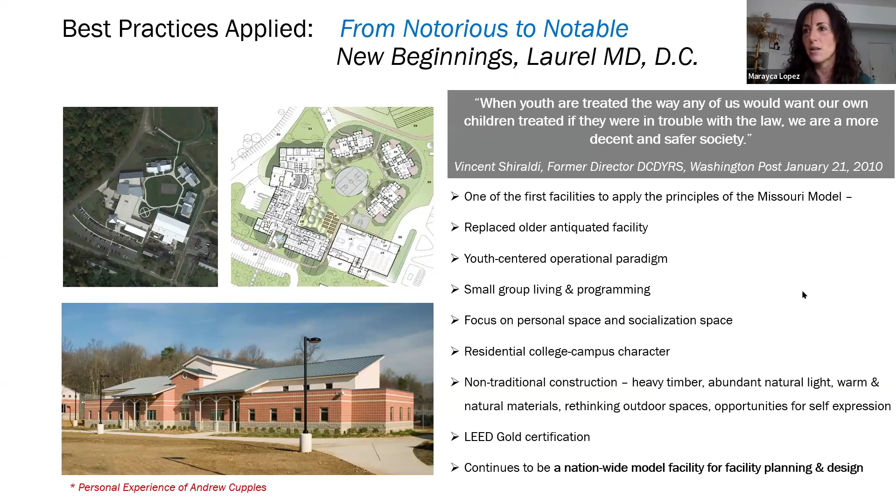As you can see, I'm showing one of the cottages, one of the residences. But what I'm going to show next is the feeling of the open campus.

For some level kids, the movement throughout the campus is free. For others, it's escorted, but in any case, it emulates how their daily life will be in the community.

Like in the morning, they will leave their houses and go to the school building, either to attend a class or maybe to receive some kind of vocational training and living skills.

I cannot help but stress the importance of the chalkboards, because the boards allow the kids not just to express themselves, but from a management perspective, we also discovered that from the staff's perspective, this has become an intelligence tool, because there is a lot you can learn from what the kids display in those chalkboards.

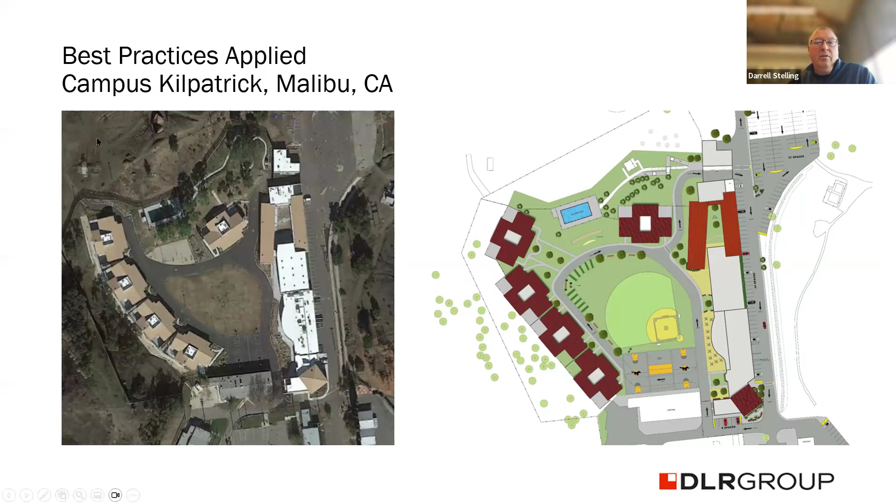With every facility we do, we're creating a new model for that specific jurisdiction based on the kids they have and the specific issues they have. But they're all built on that premise that goes all the way back to the Missouri model. We're developing newer and newer best practices as we move forward designing these facilities and learning from each one. You'll see a lot of similarities, but also a number of different nuances.

So we start off with Campus Kilpatrick, which is the first model we did in California to develop a new model for LA County. This project is a very remote Malibu Hills facility, so just with that, it presented some challenges for them, but it is very much a camp, as you saw with the other facilities that Marayca showed.

It's really about creating a normalized environment, creating a campus, creating normal attitudes for the youth incarcerated in the facility to have a normal daily function. They are in their housing units at night. During the day, they're walking out to recreation, walking to their classes for school, walking to the gymnasium, and dining in a dining hall just like they would in a high school setting.

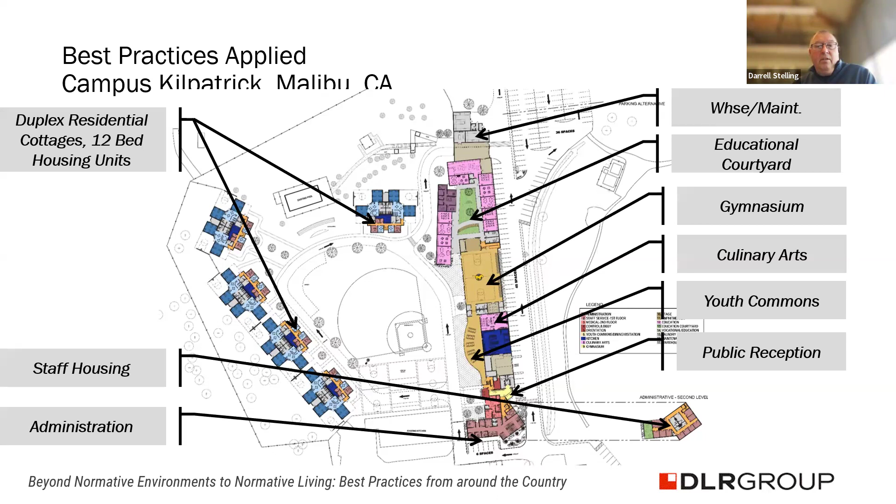The security measures are very passive in these facilities, in that they're still hardened in some locations to allow for safety, but the passiveness is that you don't recognize it as something secure like you would in the old style facilities or adult detention, which everything kind of stemmed out of.

It does not look like a control room in this facility. It looks more like just a normal office space. As soon as you approach the entries into the facility, again, it's a very normalized campus-like environment, like you're walking into a high school atmosphere or even a junior college type atmosphere. Go ahead and go to the next slide.

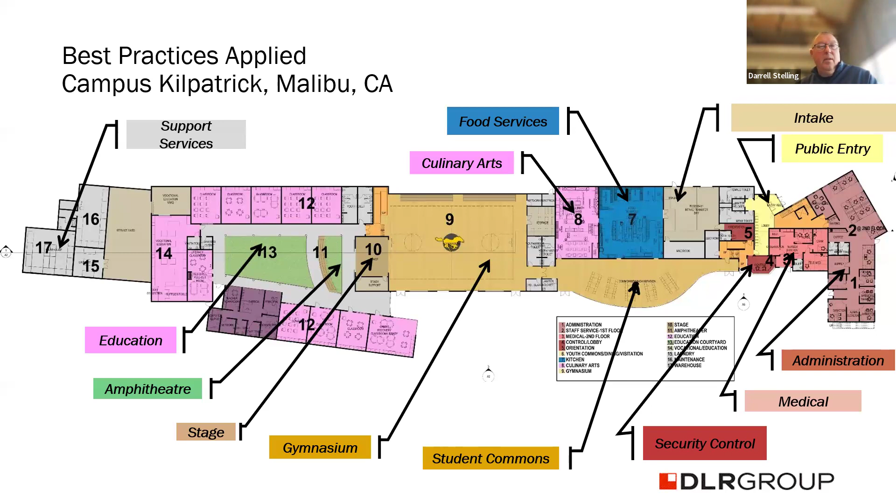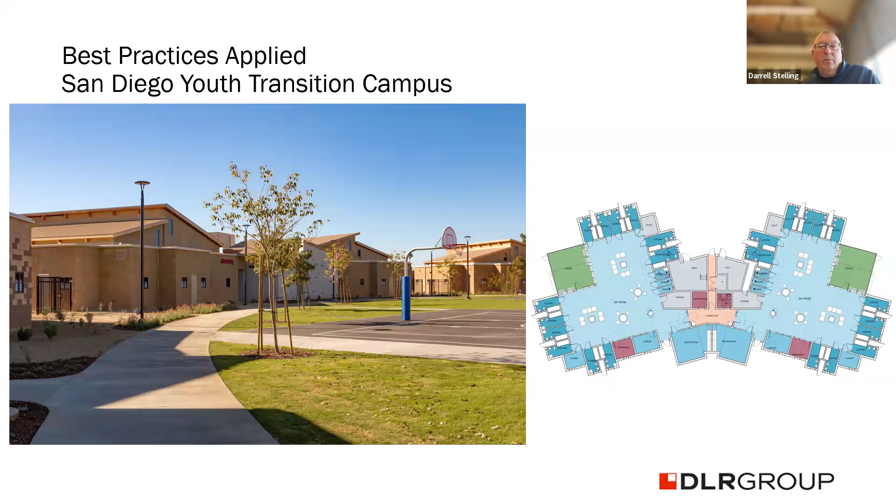So the perimeters of the buildings are totally secure. We have security windows on the perimeter, but we did things with these to still make them look more residential in style. We did muntins on the windows instead of bars, and different things to make the things that make it secure be more passive in nature than hardcore looking from a security standpoint.

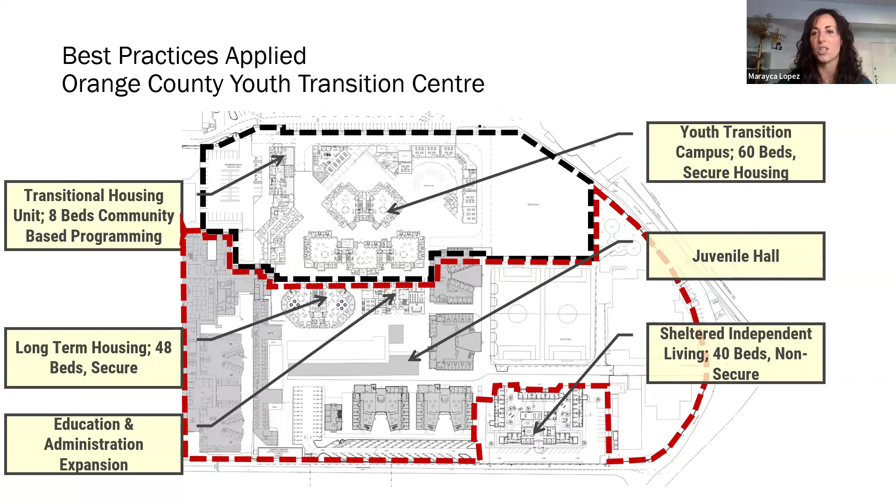That's why we're co-locating in these facilities this type of services that didn't exist in the past. Even when they say everything should be community-based, when you dig into what exists, there aren't a lot of shelter beds or transitional housing in the community for this population. So we're bringing them and co-locating with our secure facilities, but outside the secure fence, and sometimes under the jurisdiction of a different department, which helps with the budget.

That sheltered housing unit is the first time we've seen that done in the nation, built new from scratch. We've seen some retrofit attempts at parts of that, and we've seen it done in a couple of adult institutions, but this is the first time we've seen it done in a youth institution. So very much the next thing to come.

So here's a floor plan image of the overall layout I talked about. The upper right is the classroom, very similar to before. This is a much more compressed site than the other couple of sites we showed you, but we're still trying to do the same things.

Kids still leave their housing units during the day and come back at night. So when they're out, they're meandering through the site, walking from place to place where they're supposed to be during the day - either in school, walking over to dining, or to recreation, which is actually off to the right. You can't see it in this view since it's part of the existing facility, so we're not really touching that portion.

It's really set up just like the other facilities to normalize the way they go about their day. This will be heavily landscaped, which shows what we're doing from a landscape standpoint.

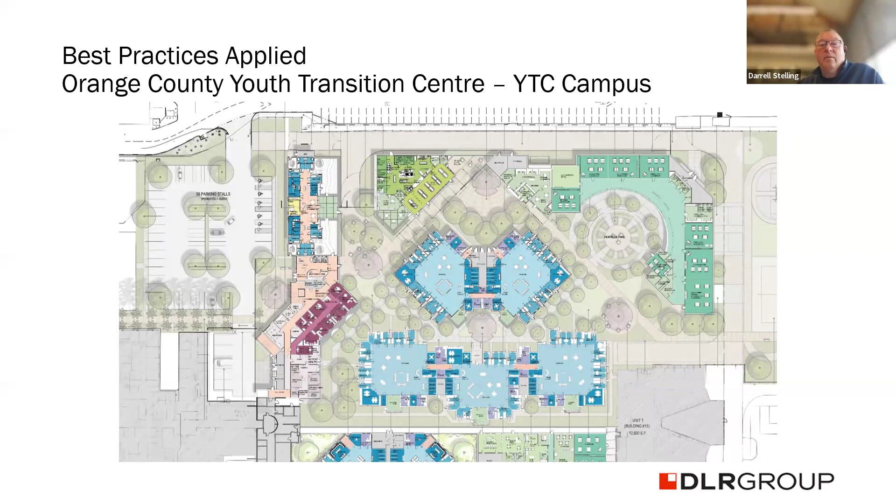There's an aerial image here, and again these are all on the boards - we've just finished the first phase of design. It gives you a sense of how compact this is, but we're putting all these things in between the buildings to make them meander through the site, really having more of a normal experience as opposed to an institutionalized experience.

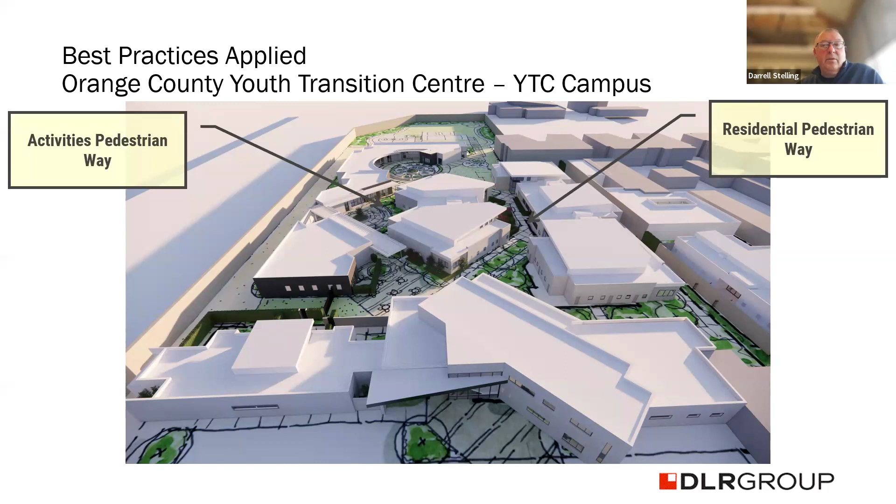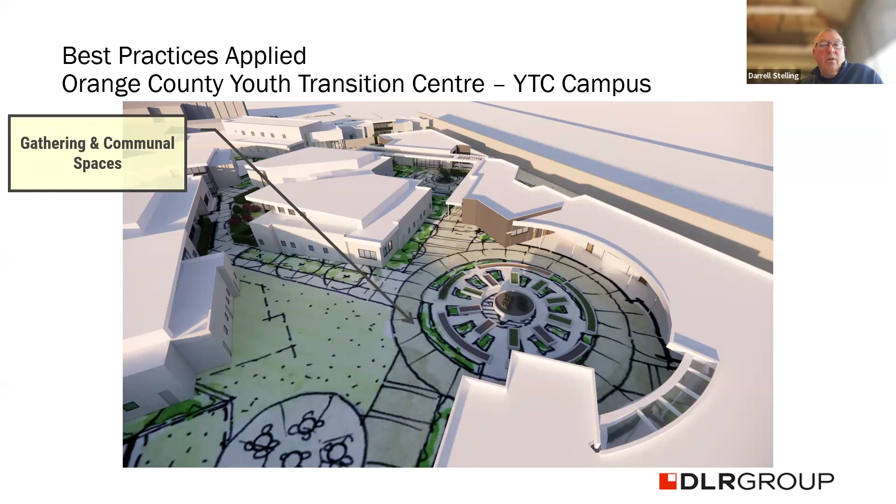The circle that you see in the middle of this is both a gathering space, a communal space, but this is also their horticulture program. So it's their horticulture garden in the middle of that circle.

We've already talked about this housing, it's very similar to the others. Let's go to the next. Just the looks, there's the overall site. Yes, looks like apartments. I want to get to the other housing unit.

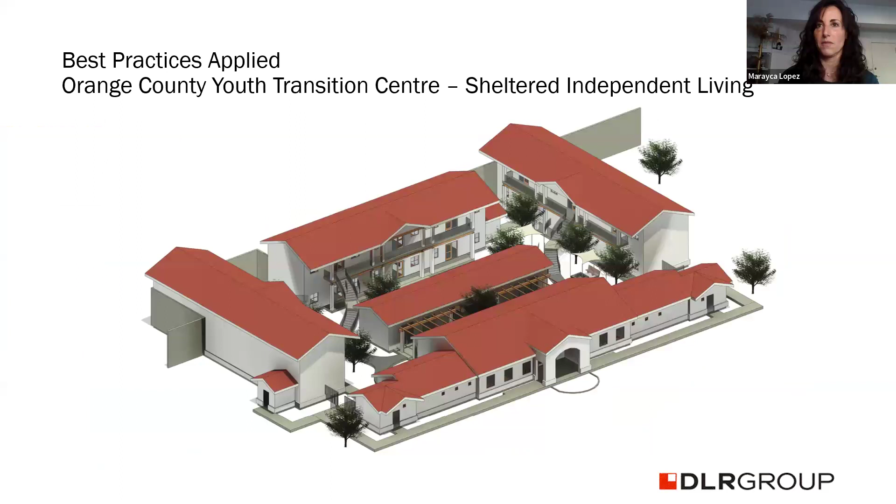Oh no, I wanted to show the long-term housing unit. One back, one back, right there. So this is a long-term housing unit. So everything that we've showed you thus far is a single-story unit.

And best practices, that's the way that you need to do youth facilities now. You don't want them to do the more detention tiered type look. In this instance, though, we do have to go 2 stories just because we're so limited on space in the facility. But we're implementing tactics so that this does not look like a normal detention facility.

So you'll see that the stairs are one of the ways that we're doing that. We're tucking them back in, instead of making them come out into the day room, so you don't see them from out in the day room.

They're really minimalized. You'll see that from a room standpoint, we don't like to stack the rooms on top of one another. So you're seeing that we're utilizing mostly program spaces on the lower level, but just from a square footage standpoint, we still had to put 4 rooms on each side on the lower level.

But when you get up to the upper level, it's all bedrooms, and the balcony that's up above, basically it's going to be a wood balcony with wood banister and those type of things to really normalize it, take all the steel out of it so that it doesn't look like a more detention type atmosphere.

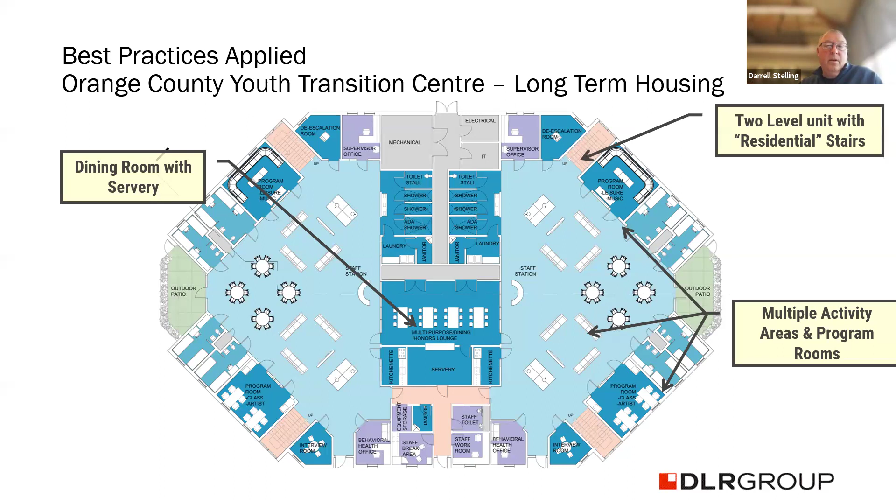We're also having to do dining in here. So instead of doing dining in the day room, that would be normal of 70s and 80s type construction, we're still putting a separated dining space so they can utilize it more normally, like they would if they were leaving the unit, they're going to a separate space to do it.

Okay, go ahead and let's go to the other. So this is the other specialty unit, the sheltered unit that we were talking about. So again, the 3 bars on the top are the apartments, and they're 2-level apartments, so they do have a balcony across the front, but it's very much the look and feel of apartment living. Each one of the apartments has 2 bedrooms, its own kitchenette, and bathroom.

So you do have to share a room in here, but at nighttime, the bedrooms are cordoned off as well. And then everything in the dark blue is again staff services. These are kids that are leaving the system in transition, or they're coming here to get additional services. So there's additional classrooms and those type of things, and staff spaces in the dark blue. And then there's some additional housing on the 2 bottom right and bottom left.

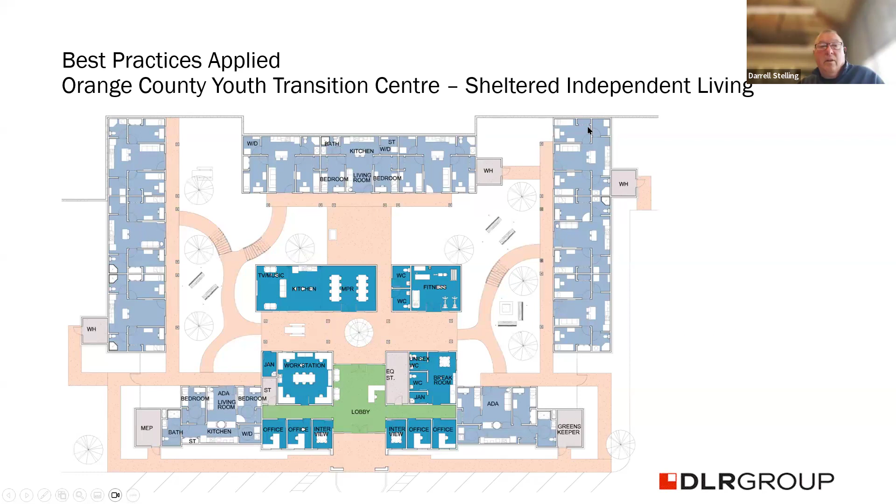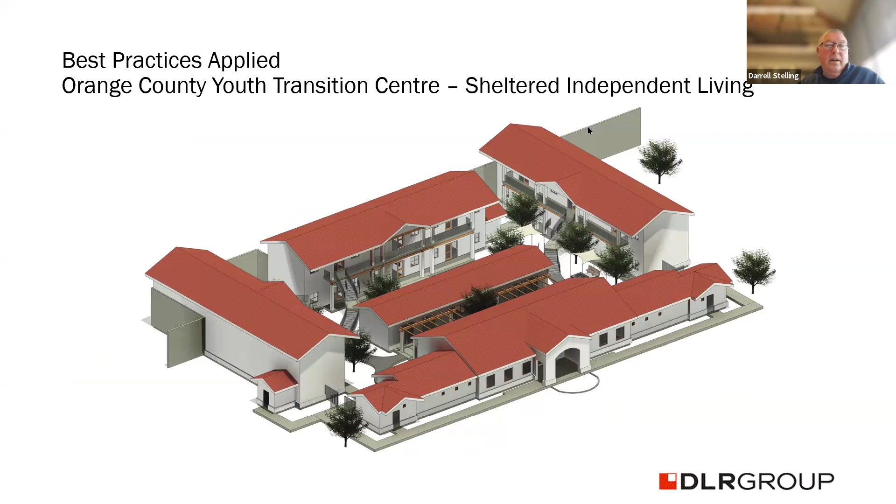Go ahead and go to the next one. This is the real nice image that you can really see what's going on here, that it's really set up as a small apartment community. So again, nothing like you've ever seen in a youth environment. Something that we're starting to get really proud of, and hoping this also becomes a new model for the extension of what started in Missouri. California has multiple new models that are extending what the Missouri model originally did.

I think that's our last image, isn't it?